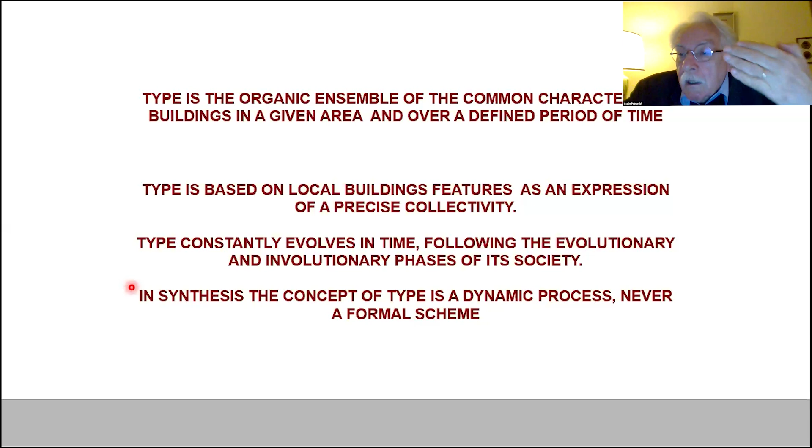The other important thing is that the type, in my concept, changes in time, because the collectivity changes, and they produce different ideas of the house, of the type. It changes also geographically, because from one place to another, the type will be different. This is very important, because in synthesis, we can say that the concept of type is a dynamic process and never a formal scheme. Some people, like Giulio Carlo Argan, for instance, believe it is a formal scheme, and the story is totally different in this case.

Why the idea of working with the type is useful in any case, besides that it is true: because you can study the small settlement in a period, and you can study, for instance, all the roofs of the houses of a certain settlement, to discover at the end that in a certain period the type of the roof was one. That means that you study 1,000 roofs just to discover that the way of making the roof in a certain area, 17th century, etc., was one. So if you are able to work with the idea of the type, detect, catch the type, that will simplify this work that otherwise will be very long.

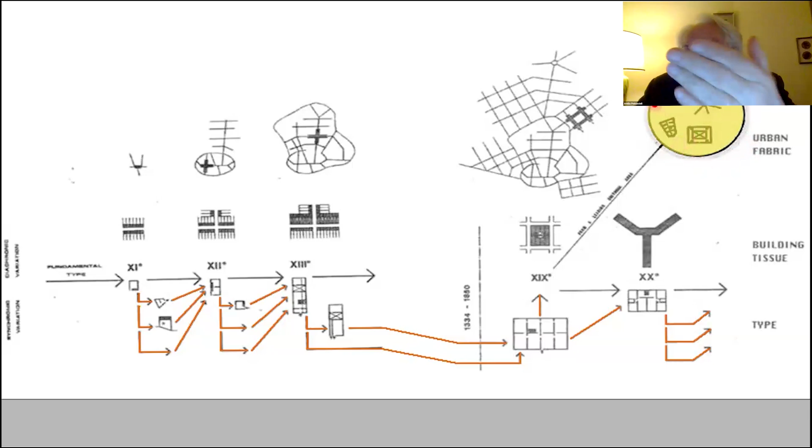What they do at that point is refer to a different place or a different culture that they think is superior culturally, militarily, and so on. Typical case: in Italy in the 19th century, the reference is Paris or Vienna. And you import types from those leading cultures. Or if you are in North Africa, your reference is Istanbul because you belong to the Ottoman Empire.

So a new current type is formed at that point, hybridizing the real building variations and this ideal type coming from Vienna, Paris, and so on. In this sense, although in Italy every city was influenced by Vienna or Paris, the final product of 19th century architecture and urbanism was different from city to city, for the simple reason that it was also based on local experience.

Fine. Sorry for this long digression.

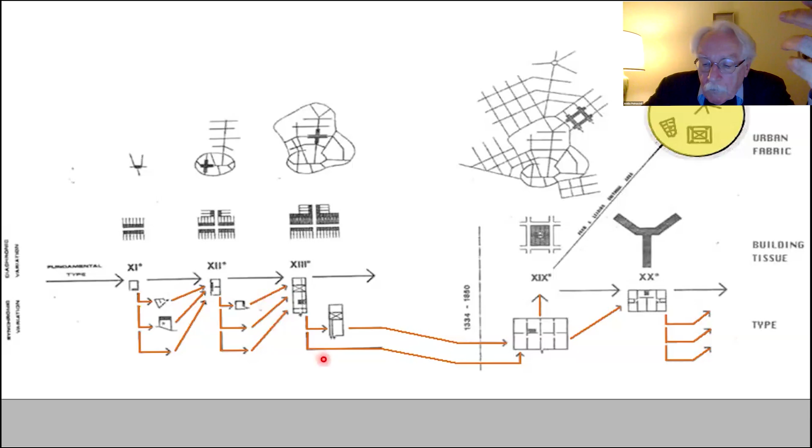Now, this process, the way I have described this product, is not only analytical, as you can imagine, because you put together so many data, okay, but also you have to infill many gaps, and that is already a moment of synthesis that you have to introduce. So it is a sort of meta project what you make in reality, a sort of redesign of this historical typological process. It's very long, but of course, with the experience, you can take some shortcuts, clearly.

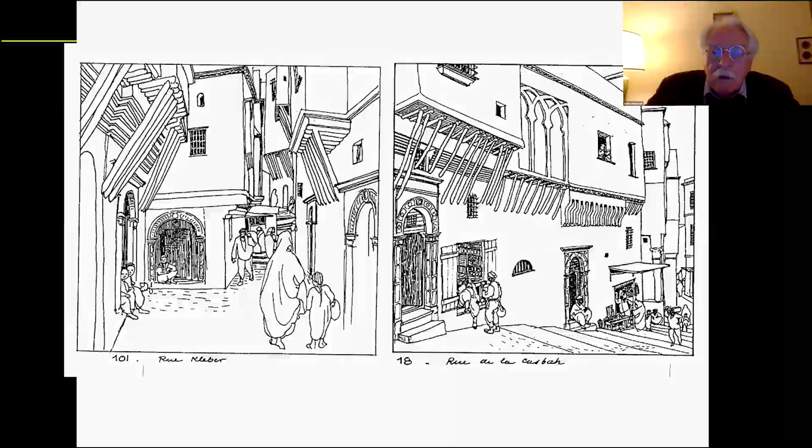But it is possible, I say, to understand and avoid too much analytical work with the shortcuts that are based on the typical behaviors of the urban fabric. Typical behaviors in the sense that everywhere in the world there are typical reactions of man when he is rational, that means not modernist, basically. They are the same in China, in North Africa, in America, or in Italy. And I'll show you the examples.

The first one is that you realize that a group, when they settle, in general tend to make regular settlements. So even a city like Sfax, a Medina of 50,000 inhabitants, is made out of different settlements in time, made maybe by different cultures. So the first technique to separate the information: you draw with different colors the different orientations of every wall. And you discover that the walls don't go casually around, but they are grouped. Every group in a certain period has a different color from another. And so you are able to start to give an idea of chronology, for instance.

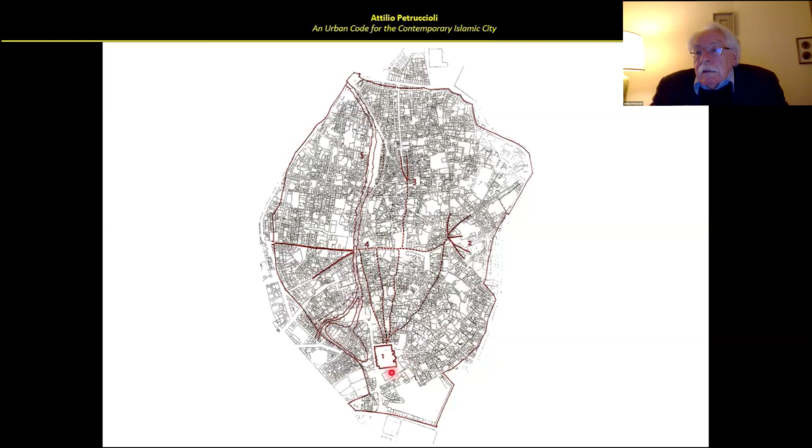This one is another case. When the Arabs conquered Sevilla, they built the great mosque outside the Roman city, at its edges. But that attracted the population in such a way that they modified even the morphology of the main streets that were pointing to it.

Well, often you will find many curves in the morphology of the streets of your fabric, and it looks chaotic and irrational at first sight. But on the contrary, it's very important, because often the curves will reveal something that is hidden and no longer visible. This is the case of three small towns in Italy, Roman towns.

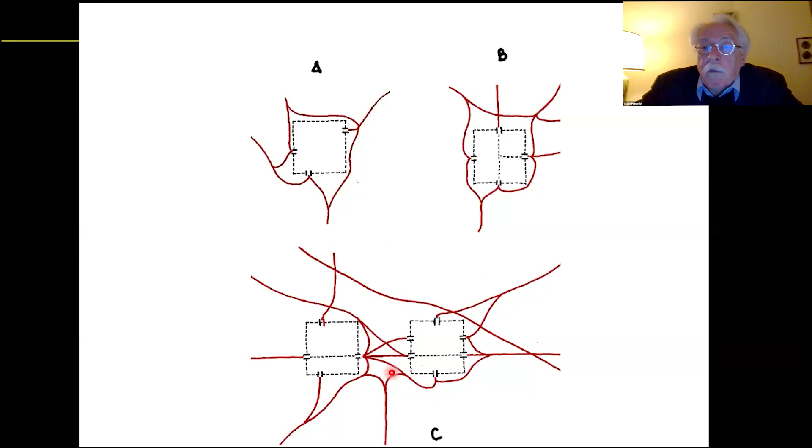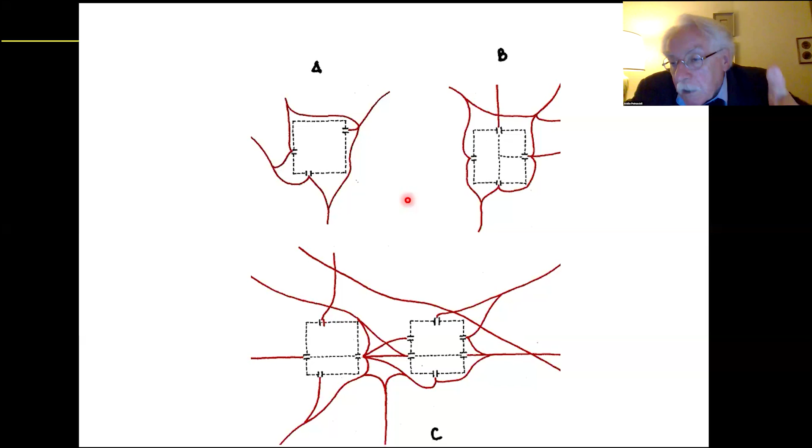What is visible in the present fabric is this group of red lines, streets. All of them clearly are tangent to something, or they avoid something. They take this form because they avoid the corner of maybe a wall, or they make a curve because they point straight into a gate and so on. So it's possible through this crowd of curves to discover the walls of a Roman or earlier old city, and the position of the gates, not necessarily always symmetrical. Look at this one. In negative, that means through the effects produced by the obstacle, in this case the walls.

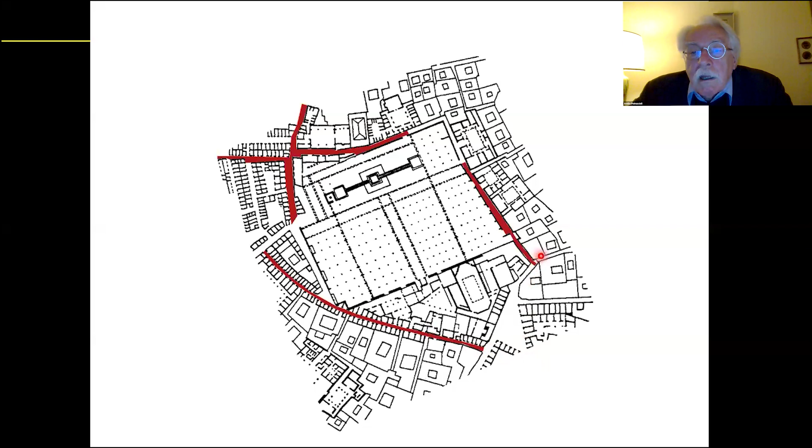In other cases, when we are in Fez, this is the main mosque, the great Friday Mosque of Fez, still existing. You see here the deformation induced in the morphology of the streets that tend to avoid the corner here, and then they go straight. Here it goes tangent to the wall, and then it separates and so on. If the mosque weren't there, we could imagine that there was, in any case, a big regular structure there that was hidden by time.

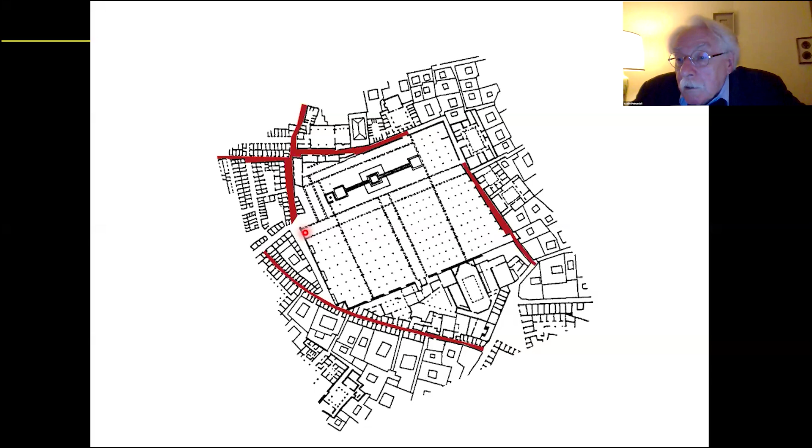Another case, very quickly: this is in Tunis, a small settlement, probably of a group, rather regular but not planned. And in time, you see that the street tends to go around, avoiding the corner here, leaving some leftover space around, like this. This is a tangent in this direction. And then in a second time, all this part is infilled, probably by the same people of the group, who use all the possible space that is left over. We call that increment or implementation, growth of the fabric.

Another thing you can note is the position of this impasse. That tells me that probably the old and unique entrance into this small settlement within Tunis was here. And then, as usually happens, houses or land are subdivided, it changes and so on. And so historically, now the entrance is here.

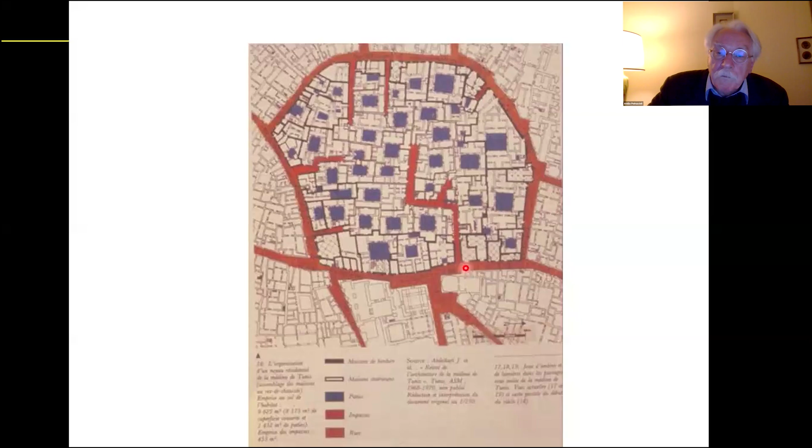An important mechanism that will tell you a lot of information, which will help you a lot, is looking at the behavior of the aggregation of the fabric of the houses or buildings, and the relation of this behavior to the public street.

This is a diagram that I have invented, so it's not real, but imagine there is a river, there is a bridge, and there is a natural first path that goes not straight, because in the countryside you avoid obstacles and so on. So this path is the original one. Along this path, the group then started to settle, and they built their houses along the path. The plots tend to be perpendicular to the street itself, because it is more logical.

Now, of course, they can settle along the path for kilometers if they want. But it's not logical, because after a certain distance, it makes sense that you use also the rear, the back part of the system, the area like this. So, for instance, after a certain point you start to plan your block. So basically, this also tells the story of the formation of the spontaneous blocks of a spontaneous city.

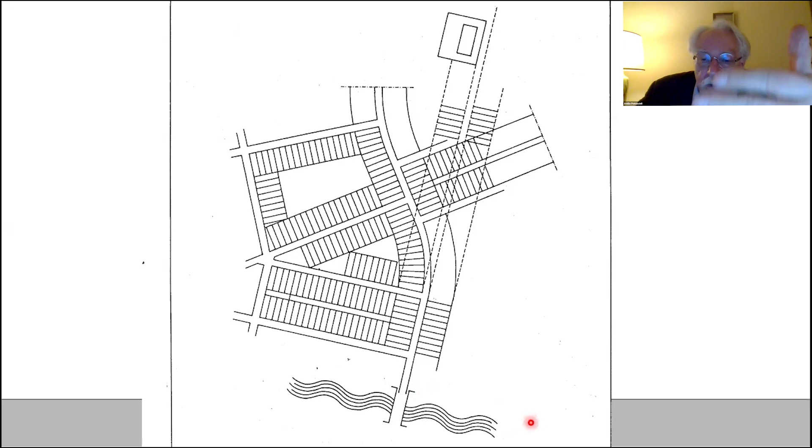There's a fourth important level of streets. Let's take a case where our city grew reasonably. The original point, the bridge, is becoming a very important node or even pole of the city, an important point of reference, economic, symbolic, and so on. Inside the fabric of the city, there is another very important node that is growing, a cathedral, imagine.

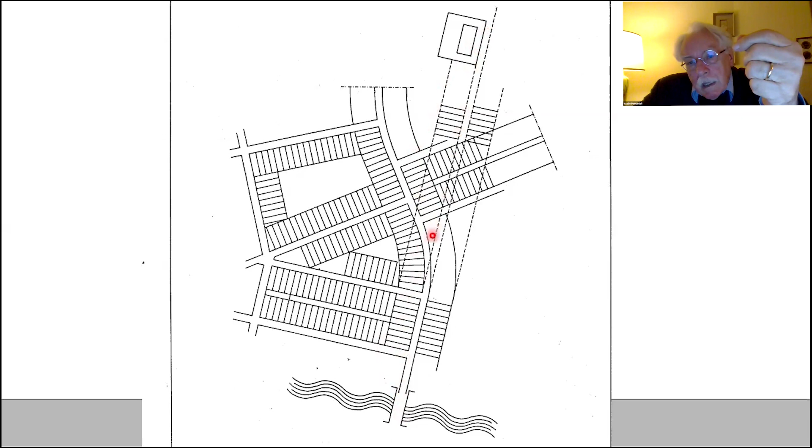So at this point, the attraction made by these two poles is so important that it becomes economically interesting to make a shortcut to cut through the fabric and connect these two points. Haussmann did interventions like this everywhere in Paris, but we also have smaller interventions in the medieval cities in Italy, or in the Islamic cities too, and so on.

How do you recognize them? It's very simple. Since you cut, in general, diagonally, casually into the existing fabric, the plots that remain, recuperated from the old fabric, now face the new street. All these plots are triangular. They are not rectangular, in few words. They are triangular, trapezoidal, or rectangular but cut diagonally on one side. So it's very important.

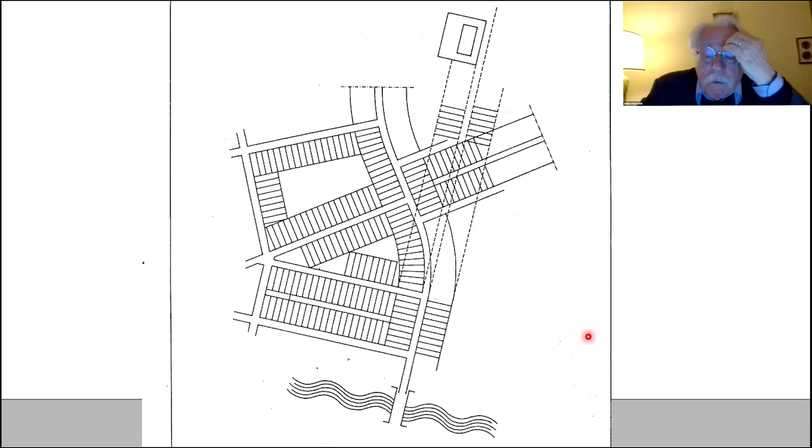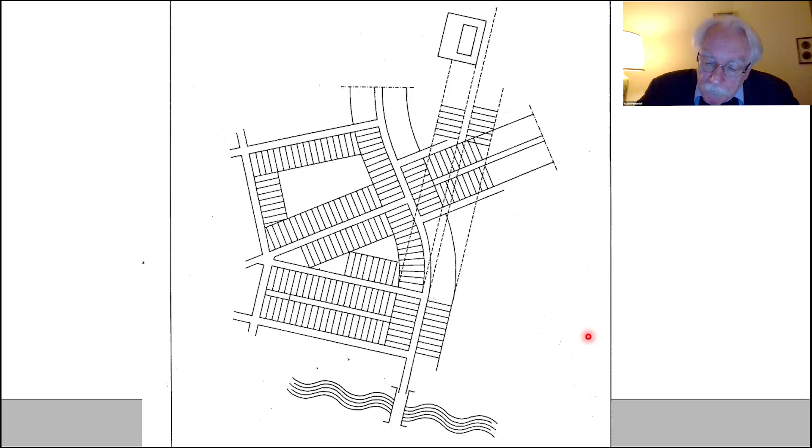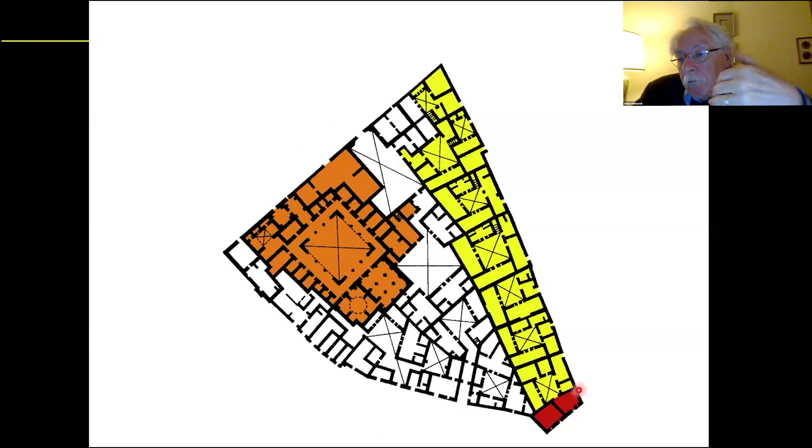Which one is the matrix, the most important, the first one? The matrix is the yellow. The yellow because, being built in the empty area, they can develop the type exactly according to the idea of the type, okay?

Here the houses are deformed, because of the form of the site, but also because it is already occupied. So this difference makes the fact that this is a planned street and this one is a matrix. And this, look, is basically an infill of the connection.

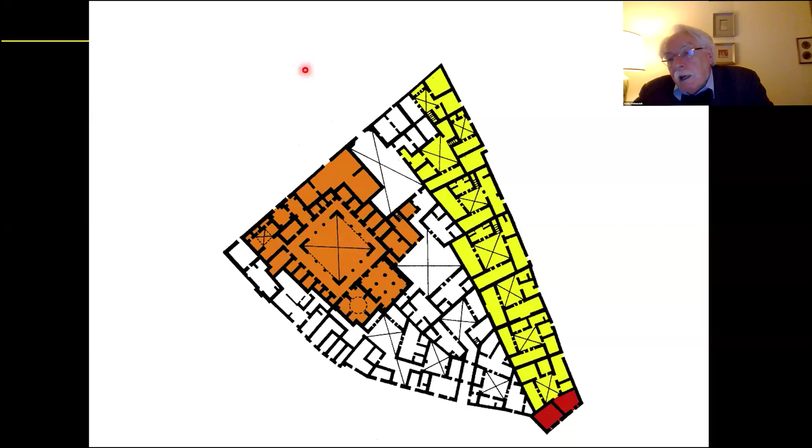This thing is very interesting because not only do you establish the hierarchy, establish a coherent chronology, but you also discover interesting things. This is a city in Morocco. It's called Essaouira. It's unusual because it's a city that was inhabited by a majority of Jews, more than 50%. And according to the history, the documents, it was designed, planned by a French architect called Cornut, according to a system of cardo decumanus. Voila, this is the decumanus, you see, straight, and this is the cardo, straight, intersecting in the center with the market. So this is the story.

Then you read this thing and you make a distinction, drawing in red what is the behavior of a matrix and what is the behavior of the planned streets, orange, okay, and then you also have some connections, gray, like this here. So what you expect to find as a matrix is along the two axes. Obviously, it was planned, it was founded, and it should be there.

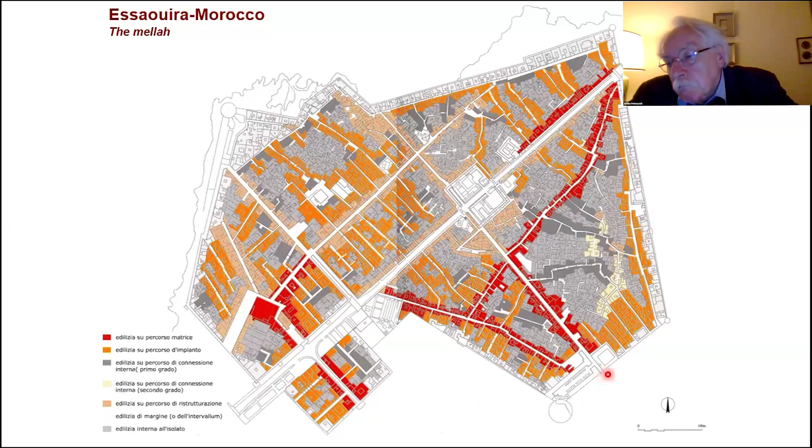Strangely, it's very rare. Only at the end, here, along what was the real ghetto of the Jews, you find this red. But where do you find the red? Here, where you don't expect. This is most probably an old path that was existing. It was existing because there were, for sure, settlements of Berbers around here, not connected, in this area. You see, those are all connections, very winding and irregular and so on. So in this sense, you add more and more information through this kind of operation that you make based on the typical behavior.

The last thing about this redesign, let's say, this meta project of the sites of the cities, is what I call archaeology without excavation, because we want to know what is underneath, but we cannot excavate. Rarely can we do archaeology. What we have to relate are the permanences, the signs that come out on the ground level of something that is underneath. Again, this is Hammamet.

It's a very interesting city in Tunisia. According to the history, it was built in the 14th century around this fortress that you see here by a local Muslim sheikh or sultan. But if you have a fantastic plan like this, and then you measure all the alignments and so on, here this is very regular. You discover that it is based on a standard, the actus, which is 120 by 120 Roman feet. At this point, this is not 14th century. This is a Roman structure transformed.

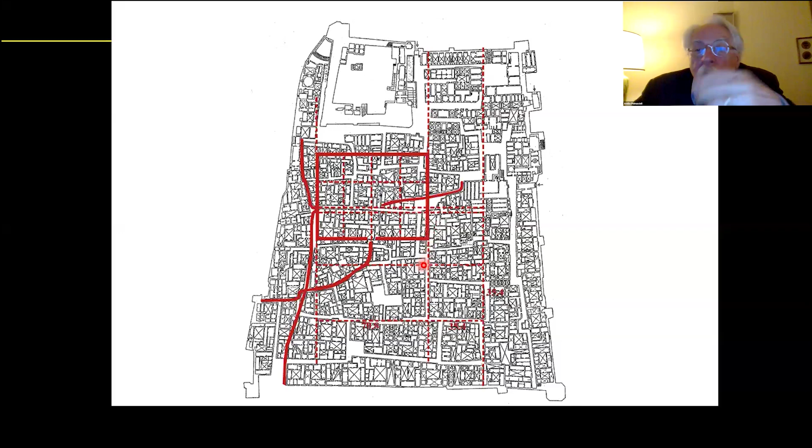The other interesting thing is that out of the signs that you can read, you see that you have some curves that all end in certain points. Particularly this mustache is very interesting, but also this here. So you can detect that there was, at a certain point, out of this Roman city, a small village of 2.5 acres, very small, right there. So this is, grosso modo, the thing.

As I said, every time you work at the level of the fabric, you can project your attention on the smaller scale, that of the building type. For instance, in this case, I show you the possible diagram of a hypothetical reconstruction of the courtyard house. We have here three different courtyard houses in vertical. That is related to the orientation, and how they get encroached. So this is the description of one of the processes of transformation of this courtyard house.

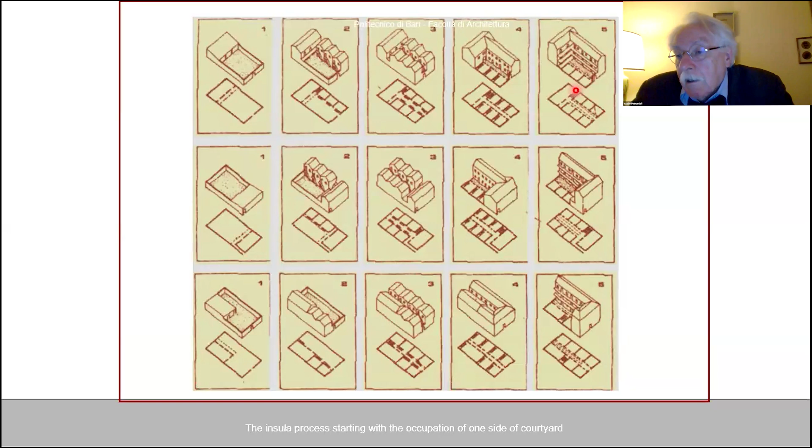This is what we call encroachment, insulation, densification. So in few words, this is a single family house, but if I build small, tiny row houses inside, then I start to densify and so on until you get a palace, even a palace. This, for instance, applies well in Rome, this big scheme. But in part, some of this applies to Venice, which clearly has a different tradition, a different condition. There is water in Venice and not in Rome.

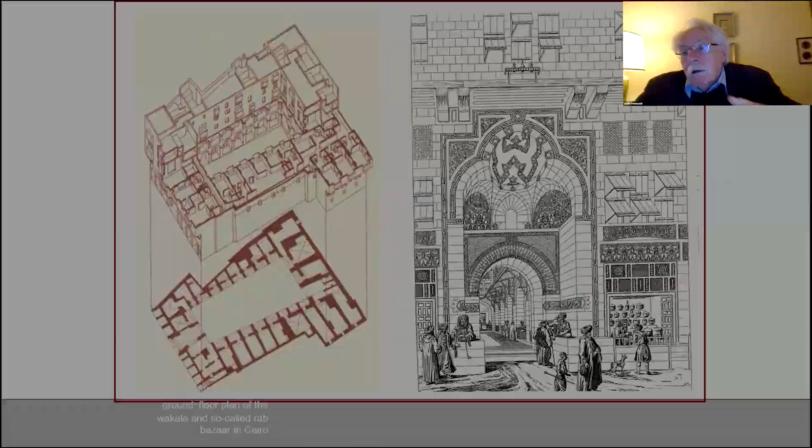Or finally, for instance, always talking of courtyard houses, it could happen that what is a spontaneous formation of a block becomes codified, as in this case in Cairo, where at a certain point this formation of encroachment basically becomes what they call the wakala. That is a combination of a commercial structure and a residential, mainly for artisans.

So basically, the ground floor that you see here is only botteghe, shops. You enter with a monumental entrance into the courtyard where you have the shops. But at the mid-level, on top of it, you have this range of a sort of loggia or portico that goes all around on top of it. And that is for the atelier of the artisans.

And then on top, you have all sorts of row houses on 2-3 levels that belong to one family of an artisan. This is clearly the transformation of original courtyard houses into a row house. But the memory of the courtyard remains on top, on the terrace. So every unit has an uncovered, open to the sky terrace.

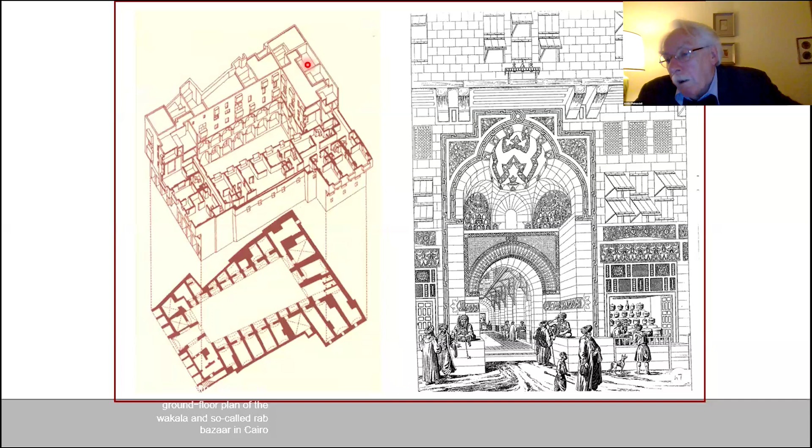Very complex structure, medieval in Cairo, medieval, imagine. But it's a part of this transformation, of course, from a spontaneous system into a codified one. So there are many of those similar, called the wakala, so a new type that we call the specialized. Let's finish the story in part.

I have very few things, but now I have a question. At the end of this typological reconstruction of the process, what will the process give us at the moment in which we make the real project? Rules, a canovaccio. Canovaccio is an Italian term of the Renaissance theater. It's a theatrical text that summarizes the story and divides it into scenes, indicating the characters and events, but not the dialogue. So in few words, it's not a real text. It's just a very schematic text in which the actors were able to play, invent, and create a lot.

Principles, meaning basic principles for the intervention in that specific site, but giving a lot of possibility and space, and this is loved by the architects. This idea, or nothing. Yeah, so clearly the archistars don't care about all this history at all. They make their own history. They are self-referential. But we don't care about them.

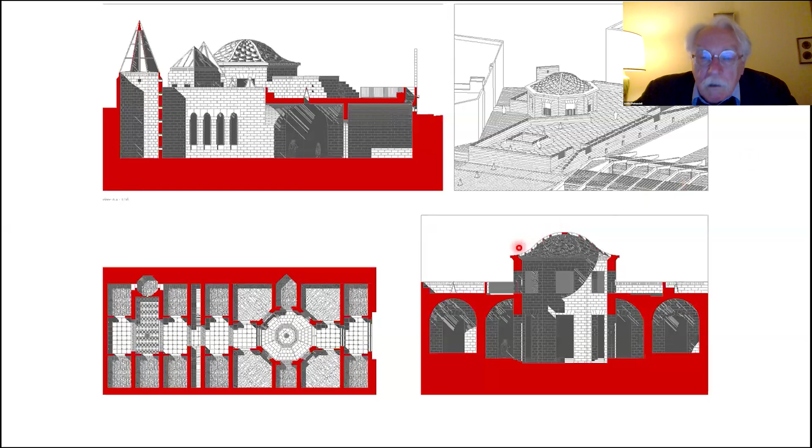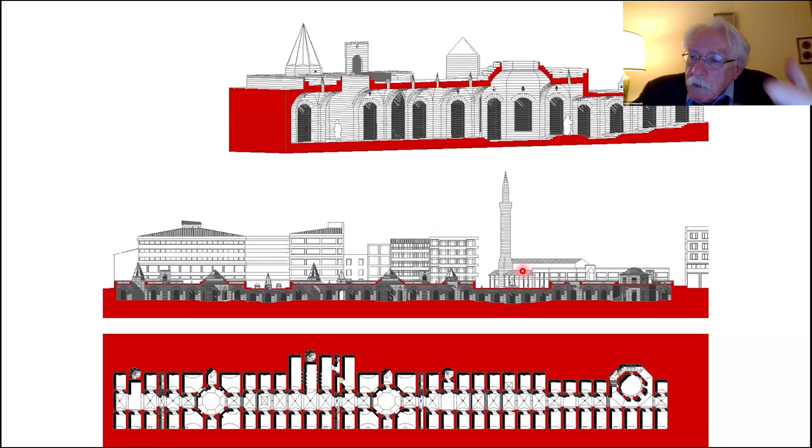You see here a project in Turkey, in Antakya, clearly very simple. It's a bazaar. It's a small bazaar that is inspired very much by the local architecture, or a Hindu temple in Bundi.

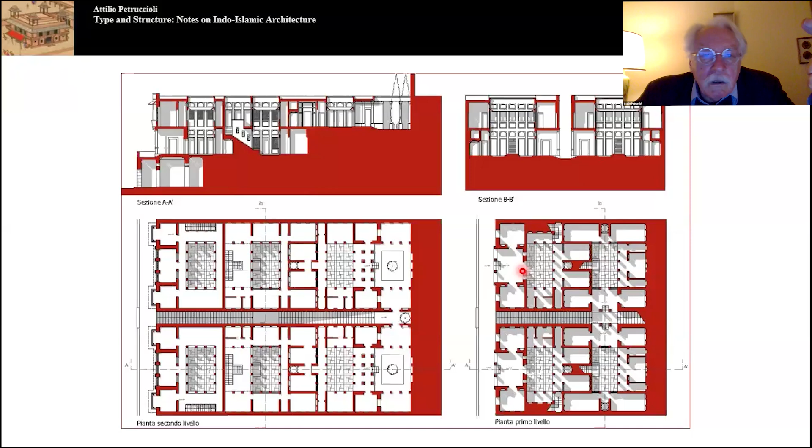Or again, a piece of residential fabric based on the interpretation of the local type in India. Again, it's Amber here, or this is the college in another city that uses it. I mean, it's clearly influenced definitely by the local typology, and it's coherent, relatively coherent, and so on.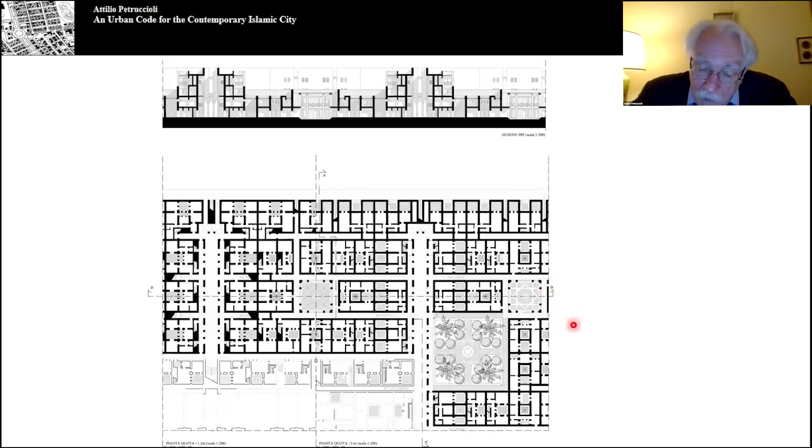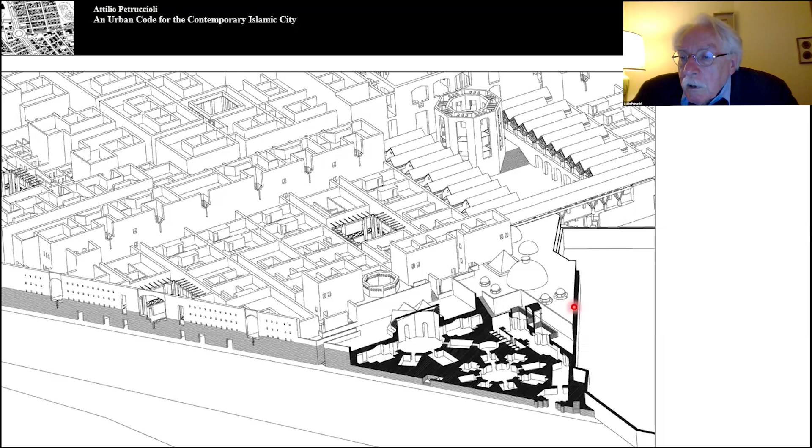So there's a hierarchy of the interior spaces of the city in relation with the quality of the life of that country. And it becomes always a compact, a very, very compact fabric, of course, because that is what you learn from those cultures there.

At this point, I stop because I talked a lot. A few years ago, I came to a thought about all this question, and I realized why I was taking the students there, and why I was designing in the Islamic countries, the poor countries, and countries out of our culture, the Italian.

And I realized that the most important thing and the most significant is the fact that those students going there, not copying from the magazines, trying to absorb a different culture, have acquired a method of looking at the reality and history.

And some of them, coming back to Italy and practicing in Italy, have applied the method to their own culture. And now they make projects that are more coherent, more logical, and are not made out of stupid invention.